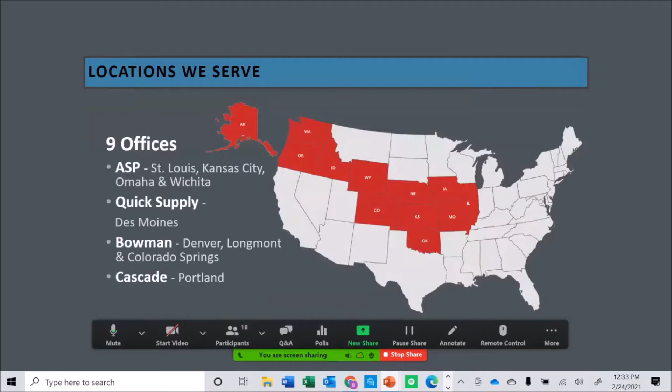There's the map that I already explained where we're at. I'm currently sitting in southern Iowa, not far from the Missouri border, but I cover all of those states. Haven't been traveling much due to COVID. In fact, I haven't traveled at all since last February, but I do a lot of virtual meetings.

We're focused on our earth anchors today, but we use those to support our erosion and sediment control market, as well as some of our other markets. We have some road projects, roadside stabilization projects, some creative stormwater projects we get into. Some of our locations actually deal in hardscapes. I focus primarily on stormwater management and innovative solutions involved with stormwater and erosion control.

We are blessed with great logistics. We have fleets of trucks, very good warehouse staff and drivers, and a lot of inside and outside storage at all of our locations. What that matters to you is we're kind of a one-stop shop for a lot of different construction site supply products. So we are a distributor.

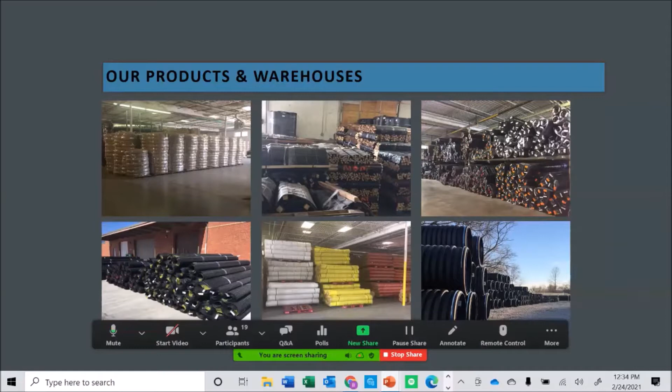We do not manufacture anything. And even though I'm a licensed professional civil engineer in Iowa, I do not compete with engineers. I help engineers and landscape architects with their designs, work with a lot of city, county, state, and federal government agencies. I also work with contractors to train them on new solutions, to help facilitate pre-construction meetings. When the pandemic allows, I'm often on site, hands-on, making sure people get past that learning curve, so anything new to them, they pick it up quickly. It makes everybody more efficient and more successful.

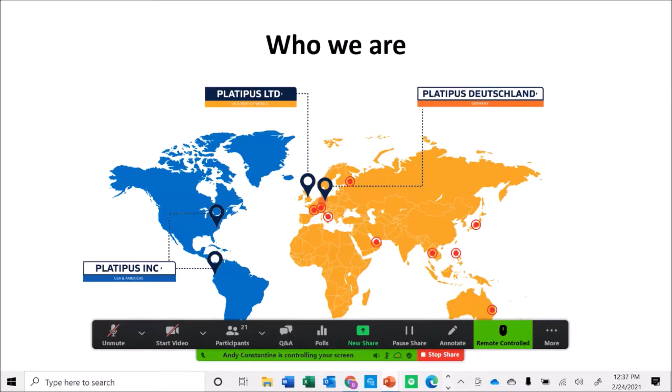Okay, all right, you're on the who we are. I'll tell you a little bit about Platipus Anchors. We started about 40 years ago in the UK, 38 years ago or so. Our owner became a manufacturer of what's now known as percussion-driven earth anchors. He came up with some ideas that he thought some of the early earth anchors could benefit from, moved production around a little bit, still mostly European, until he opened up the US operation close to 20 years ago. He had a distribution facility before that for maybe 10 years, but really got into the US 20 years ago. We distribute worldwide, as you can see in this slide, mostly through select distribution outlets. We're not everybody's commodity product, but we certainly are a solutions provider.

All right, so I guess I gotta... it delayed me, sorry guys. You're clicking pretty fast there through a couple of slides. Well, I clicked and it didn't go. Yeah, so I clicked it a second time, it might take a couple seconds every now and then. I have nothing else running, but you shouldn't be more than a couple second delay. Okay.

All right, this is the slide we wanted. So this is a really good animation. You can kind of get an idea of different applications for percussion-driven earth anchors.

You might think of the guy wiring you see on utility poles. In the UK, lots of Europe, China and other places, they use percussion-driven earth anchors for tying down or guy wiring telephone poles. In the US, not so much. They use a helical anchor for that because they already use a drill to put the telephone poles in. So they basically take the drill off of their big machine, put a helical anchor on it, screw that into the ground, and tie off to that. But other places you'll see a percussion-driven earth anchor is vineyards and agricultural.

We're probably the largest solutions provider for buoyancy control with pipe. We work with ADS and several of the other large pipe manufacturers to make a buoyancy control kit. Then you'll see us in landscaping for root ball tying down. We don't typically do a guy wire on the trees - most of ours is below grade. But what we're going to talk about today are anchored reinforced grid solutions. That's slope stability predominantly, some erosion control, and then some civil engineering applications, either temporary or permanent walls.

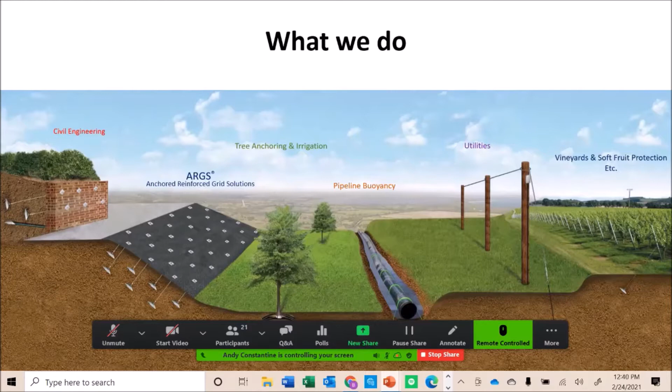So what is a percussion-driven earth anchor? It's a unique, versatile anchoring system suitable for most soil conditions. We offer an earth anchor that can be driven from ground level using portable equipment, and can be operational and proof tested immediately. It's grout free and doesn't disturb the soil when you're putting it in. There's a little disturbance as you're driving an anchor in, but you'll see in some of our installations coming up that it doesn't take a whole lot of work on the ground to get things moving.

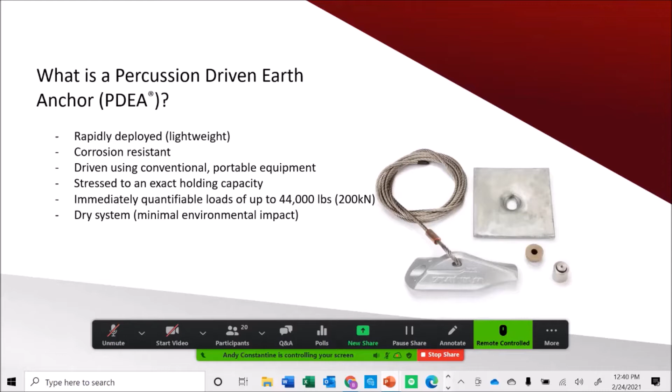I'm going to show you quite a few animations in this presentation. The first thing I want to point out is that these animations are available on YouTube. If any of you want to go back and look at them later, or share them with somebody, you can go to Platipus US, as in United States, and you'll find probably 7 or 8 different animated videos. If you dig a little deeper, there's probably 40 or 50 worldwide. We've got a group out of Switzerland, another out of Australia that put a lot of good videos online as well.

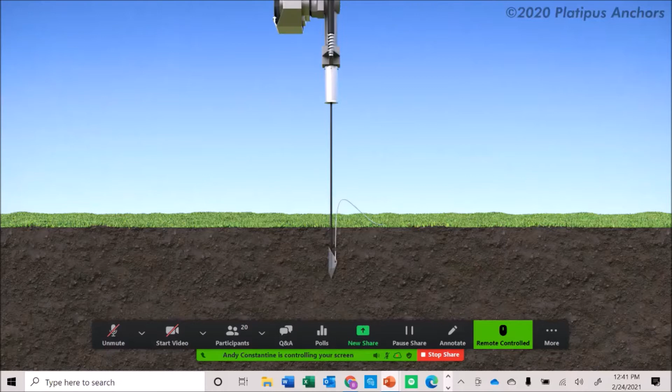What I'm going to do with this first animation is show you how an earth anchor works - the installation process, removal of the drive rod, and then activating that anchor by pulling up on the tendon. This tendon can be wire or all thread rod, but what we're going to do is create a bulb of pressure down in the soil. This whole principle of installation and loading the anchor is the same from our smallest anchor all the way up to our largest anchor.

You drive it, remove the drive steel, then pull back on the tendon or all thread rod and activate the load. What we're really pulling against is that bulb of pressure - we're not pulling against the anchor itself. Well, in principle we are pulling against the anchor, but most of the strength comes from that consolidated mass of soil that's directly on top of the anchor at this point.

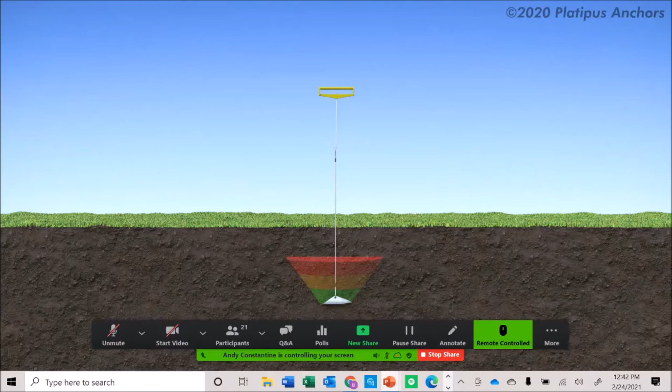Before we talk too much about the different styles of anchors, I want to talk about some of the variables involved in designing or selecting an anchor. The main one being: what's site access like? Can they get a machine in there, or can they only do it by hand? Is there limitations to where the anchor can go? Sometimes you might have utilities behind a wall or an excavation, or somebody's property line where they just don't want you to have an anchor, even though it's 10 foot deep on their side of the property.

So we run into this a lot on rail lines and that type of thing. You cannot put anything into a right of way of a rail line. They don't care if it's 20 foot deep. You can't cross their line.

So the other variables, as you see on the slide here, are really, what are the soils like? What are we dealing with? What size anchor can we even put in that area? And what kind of connection do you have to whatever that device is that you're tying down or locking off to? Sometimes it's nothing more than a stainless steel plate. Other times it's got to be tied off to another tendon.

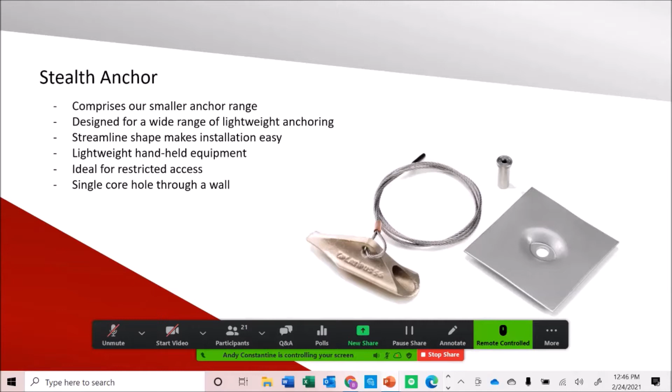That brings up our bat anchor range, and the bat anchor is a flatter, larger anchor designed to create more loads, either because you need more loads in granular soils or you're in clays. You're going to learn a little bit later in the presentation that the clays don't behave quite as well as granular soils do. So a lot of times in clays, we jump right to a bat anchor.

But the main thing to know here is, these anchors are our smallest ones, maybe 4.5 inches wide by 11, 12 inches. Really our workhorse bat anchor is a B6, and it's rated up to 44,000 pound ultimate capacity. That's really the mechanical capacity of the anchor itself. But that B6 is maybe about the size of an iPad Pro.

And then our largest bat anchor is a B10 at about 21 inches wide or long and about 13 inches wide. Maybe think of like your desktop monitor that you might be looking at right now. That's about the size of mine. So that's the largest anchor we make.

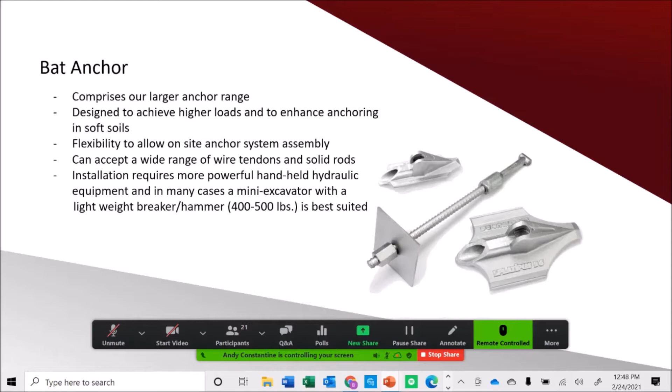As well as the different sizes of anchors, there's also different materials that make these anchors. Depending on the application, is it temporary, is it for 10 years, or is it in a caustic type environment, or is it in the ocean where you know things corrode quite quickly?

You might get into a little bit higher cost, but we use these in the ocean quite commonly, and they're not necessarily on the shelf, but we have pretty good access to them. It might take another 30 days to get them, but they are available.

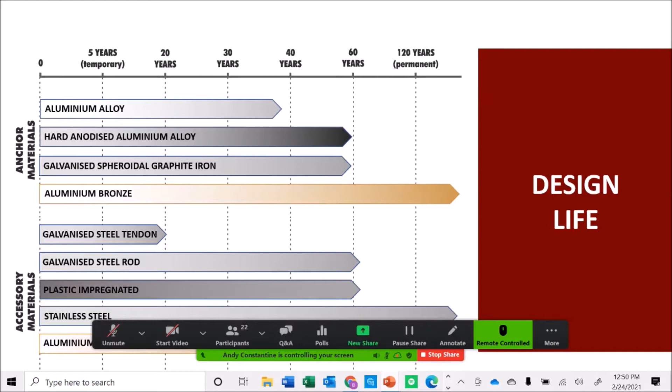So again, we ask a lot of questions going in when we start talking to either an engineer or a contractor or an agency that's dealing with an anchor. One important item, other than its longevity, is how does it tie off, or what is the top accessory?

The other thing we see on these ACBs is a tripping hazard. Sometimes maintenance folks will get on there, or even kids playing on it. So one thing you need to know about these plates and wedge grips is nothing is standard. We custom make everything. We don't have one set component that we use across multiple applications. We really build anchors to the spec or to the client's needs.

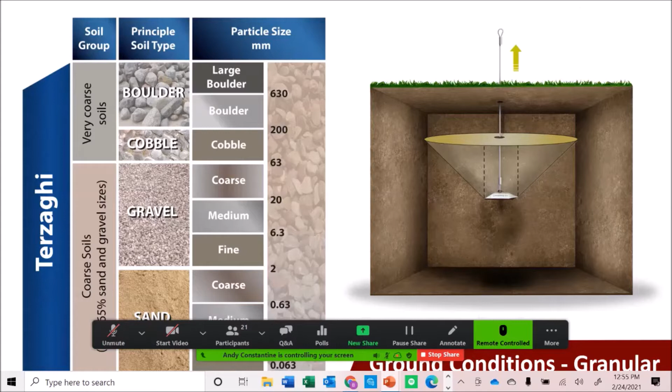If we're in granular soils, you can pretty much think about Terzaghi's equation. Some of you engineers on the call are probably familiar with Terzaghi's shallow foundation calculations that he came up with, I want to say 60 or 70 years ago. They're commonly taught still, commonly used.

Basically, we modify a simplified version of Terzaghi's equation to model a percussion-driven earth anchor. Now, our foundation isn't necessarily in the same direction as Terzaghi meant for it to be. We'll actually turn it on its side, but it still uses the same principles behind the design.

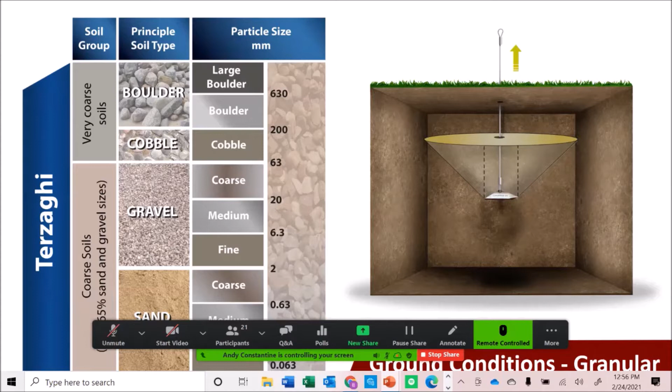That works great in granular soils. What we know about granular soils, what we've learned in the 40 years we've been making anchors and sending them out on site, is they're really nice to work with when dealing with a percussion-driven earth anchor. You can see the frustum cone, or that bulb of pressure in this slide, is very wide. As you drive the anchor in and pull back on it, it activates extremely quickly, and that pressurized zone spreads quite fast.

In clay soils, it's a little bit different, and there's a totally different set of equations that Alec Skempton came up with a little later, maybe in the 80s or 90s. He looks more at the undrained shear stress, or shear strength, of the soils to do a similar type of foundation equation to tell you how much foundation you need.

Again, we use the same theory. We can lay it on its side or upside down, whatever it is — it works the same as long as you're dealing with soils. What we found is there's a narrower cone of pressure in clays, and it'll shear through much quicker because you don't get the type of interlock that you get with aggregates. But you can still design with it using, say, a larger anchor, or making some other provisions to account for those clay soils that are more elastic.

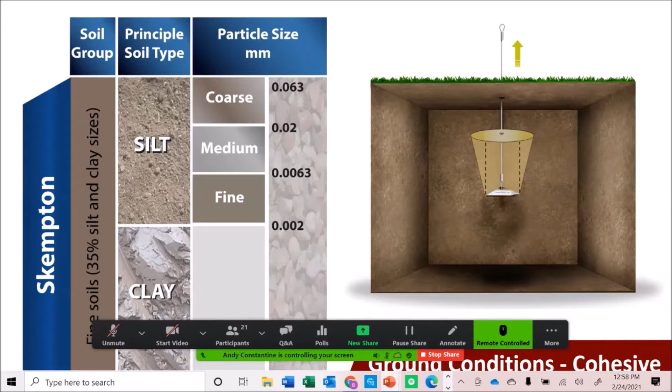If any of you have been on our website, or involved with Slide by Rocscience, or SLOPE/W software, or some of the other softwares out there, a lot of times you'll get to a point where you know how much load you need on your slope to stabilize it, and you can lay a pattern of anchors out. We like a 4 foot by 4 foot pattern because it's easy, and we always like to target our Stealth series so we can keep costs down, make the drive easy and easy to handle.

To give you some idea, an engineer may come in, run his slope stability software, and come back and say, hey, I need 400,000 pounds, and I want to spread that load out with 100 anchors on a 5 foot grid pattern. So he'll go back and do his calculations: 400,000 divided by 100, and he'll come up with 4,000 pounds per anchor. That's probably his working load because that's what the software told him.

Now he needs to figure out which anchor will work in those soils to give him those 4,000 pounds. That's where this anchor load indicator comes in. He can go online — you do have to register to use it, it's not for just anybody. We'd really like it used by geotechs, civils doing this type of design, or a structural engineer. He'll plug in his soil parameters for a granular soil, and then select an anchor.

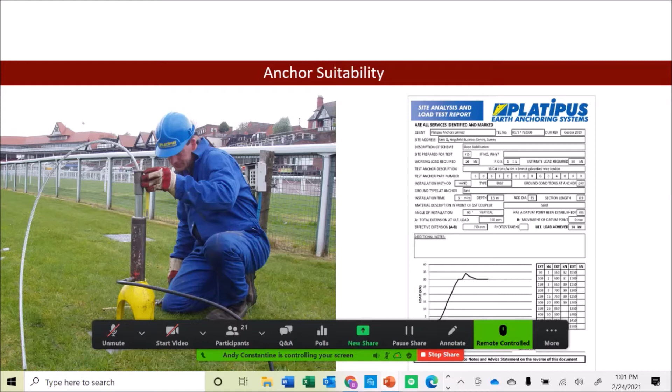So what he's going to do here is drive that anchor. He's going to put one of our load jacks with a load gauge on it, and he's going to go ahead and pull it to failure. Failure looks like where that graph flattens out, and I'm going to show it to you on this animation. It's where the graph flattens out and then sometimes even not only levels off, but starts to decline.

Early on in the test, that graph will climb extremely fast as the anchor's turning. What you're getting is a lot of extension. You're pulling that tendon, and a lot of it's coming out towards you. As you get up to the top of the graph, he's reaching the ultimate capacity of the soil. It's not going to pull out as much. It might only get an inch or so every few strokes of the jack. And then eventually it's going to level out, and then it's going to fall off. Sometimes you'll even break the wire tendon or the steel tendon at that point.

But what this tells us is that we can actually go back and back-calculate with the size of the anchor and the other items involved in this test, and get a pretty good reading of what those soils are. So in lieu of having a good soils report, we actually can send an anchor out, and something we do quite commonly - we usually do it free of charge even, and loan them the tools to run the test.

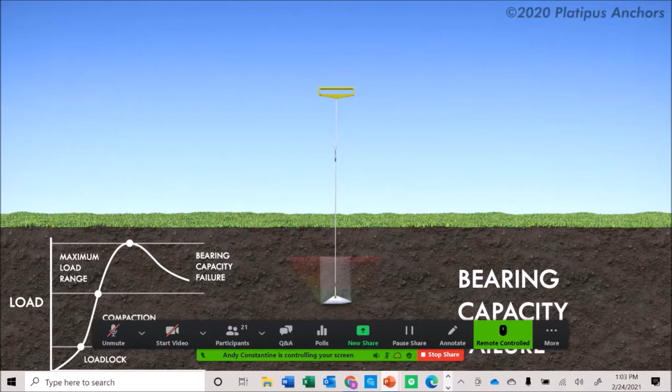We'll do feasibility assessments. We can do a design review if it's one of your first ones or your 10th one, whatever it is. It's quite common that a lot of the engineers we work with will send us over their design and ask, hey, can I do something to take some cost out of this? Or can we do something to increase my factor of safety? I'm not able to figure this one out. And so we do have that available. It's always free of charge, and they're always ready to go to work for us.

The only disadvantage we have with these guys is they're hours ahead of us. So if you're on the West Coast, that's going to be, you know, maybe a 7 a.m. call for you, because he's 8 hours ahead of you.

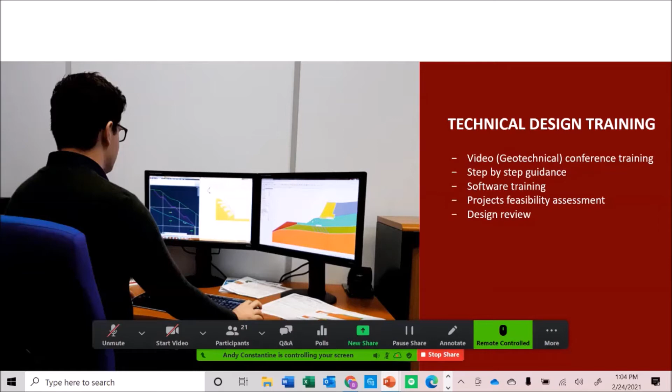All right, so one thing that our geotechnical group does for us is provide conceptual proposals. With a conceptual proposal, they'll typically run the analysis for slope stability or wall stability using third-party software. We don't create our own software. Again, we use mostly Slide, but they'll run the calculations. He'll select an anchor, put it on what he calls an anchor scheme. We'll create a specification for you, and we'll give you a quotation for it, showing you what the system will cost, less the labor to install it and shipping and all that stuff.

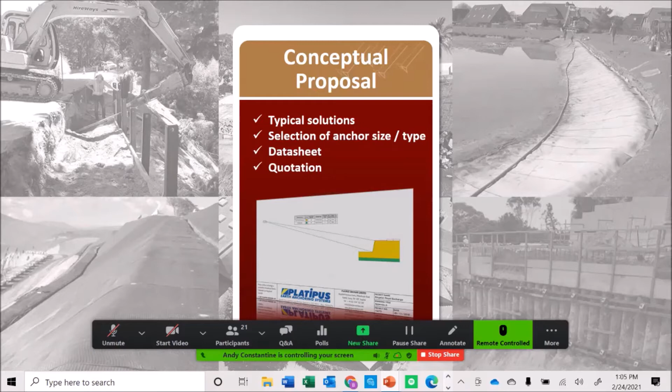He'll usually put some pictures in that are similar to that type of construction. They'll go in and do a full summary based on the information provided, including the soil parameters, the cross section itself, what access is like, and that type of thing. And then he'll actually show the slope analysis with and without the anchors in it, and the factors of safety that were gained.

And then of course give you the solution. He'll also, if you have a tie down application and you're having a hard time trying to figure out how to tie that thing down with a dead man or whatever, it's very common that we'll take a look at those and come back with a mini report. It won't be 20 pages, but it's something he can certainly take a look at for us and get you something back. This is what one of his slope analysis solutions would look like.

It's going now. Yeah, I was still talking there, I think. So, oh, maybe, oh, you know what? It was delayed for me.

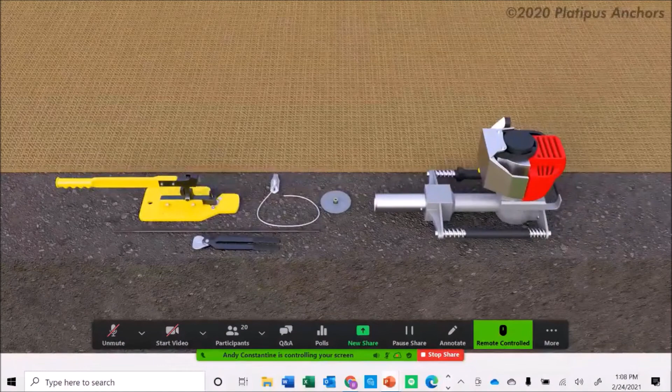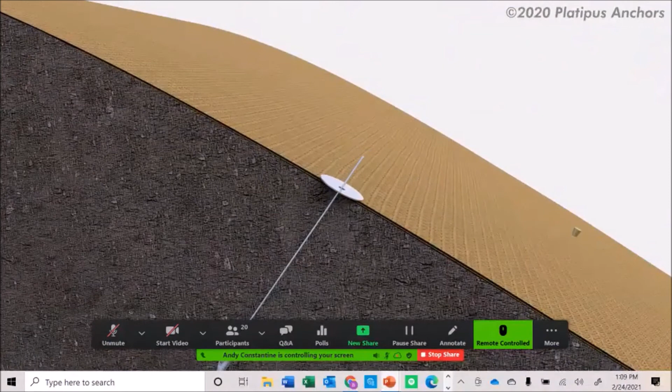So, okay. All right. So this is our erosion control application. In this particular case, you'll usually reprofile the soil, basically get rid of debris, smooth it out, put down your matting, and then you'll come in with a small hammer.

Usually can be gas powered, or we like small electric hammers a little bit better. Drive your anchor, put your plate and your wedge grip on, and then your device that you're going to use to load that anchor. We call this our SJ5. You can do this by hand, or there's another product called the Jack Jaw that is available. You can buy them on the internet. And then you might also use a hydraulic jack to load these. But most of the time for erosion control, you're not really measuring the loads. All you're doing is just tying down that mat permanently and mechanically.

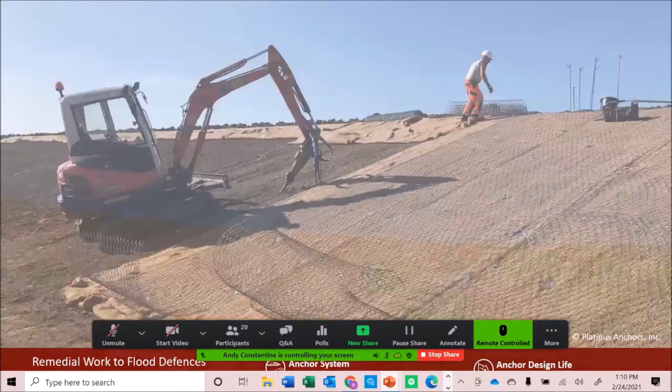All right, so here you have a typical type erosion control application. This one's over in the UK. Nice little project. I always think that the US is so much far advanced from an engineering standpoint than other parts of the world. And while I think we probably come up with a lot of the standards, like using an erosion control blanket, they actually did a pretty nice job on this project, as you'll see here. And I guess we're leaders, but they're not dummies either.

So here you can see they're using a temporary mat with a twisted wire over the top of it. In this particular case, this is an S6 anchor. So this anchor is about 7 inches long, maybe an inch and maybe 2.5 to 3 inches wide. And it can take up to a 1-ton load, so somewhere around 2,200 pounds on an application like you're seeing here. The anchor itself, you could load up to 2 tons or even probably 2.5 tons.

But here you can see the setup with this mini excavator. That hammer that's on there, that size hammer will drive even our largest anchor. So here they're using it for an S6. He'll pull the lever on that hammer to activate it, and that anchor will be driven in probably 7 or 8 seconds, if that. Then he'll pull the drive steel and they'll come in and put their tensioning device on and load that anchor up, and then snip off the leftover tendon and take care of that.

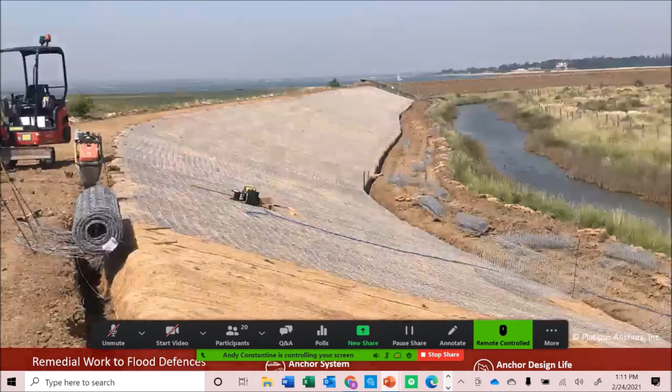Look at those anchor trenches. Nice job.

In my 30 years of experience, the biggest challenge I always had was getting the contractor to actually construct those anchor trenches and put them in correctly. So whenever I've been in and out of erosion control for years, when I was out of it, whenever I'd see an application and somebody wasn't using trenches, I'd usually go over there and make a big fuss over it. And some people would listen and some would tell me to go somewhere else. So some people, in my experience, don't want to do the trenches, so they think if they use enough anchors, they could forego the trench.

Yeah, I disagree. I still don't like that double row of staples. I still believe the best way to handle your project is with anchor trenches, because it cuts off any of the water that could get underneath those mats. I put my first TRM in probably 93 or 94, and I've used the anchor trenches ever since, and they've never been a problem. Where they don't use anchor trenches, they do have some problems. Yeah, my 2 cents.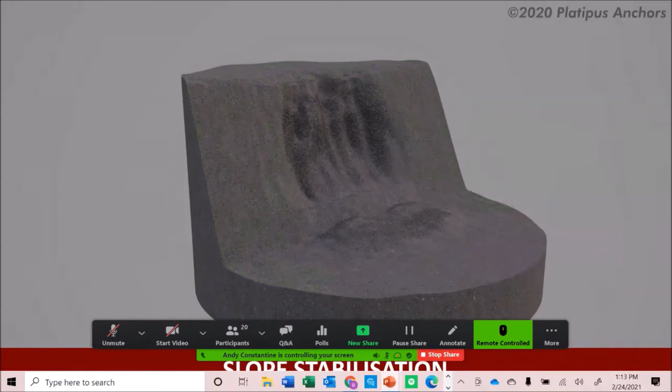All right, so now we'll look at some slope stabilization. Are you guys seeing this animation now? Yeah, it's rolling. Okay, good.

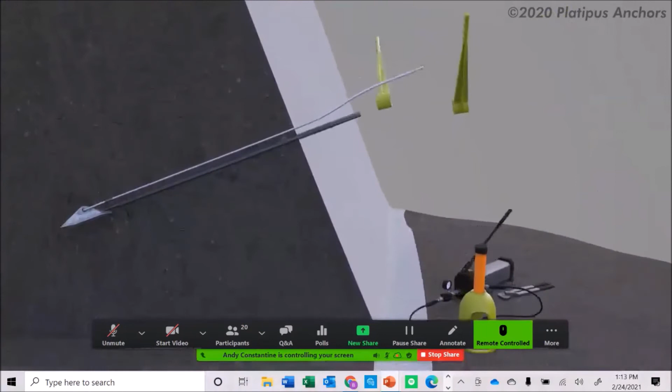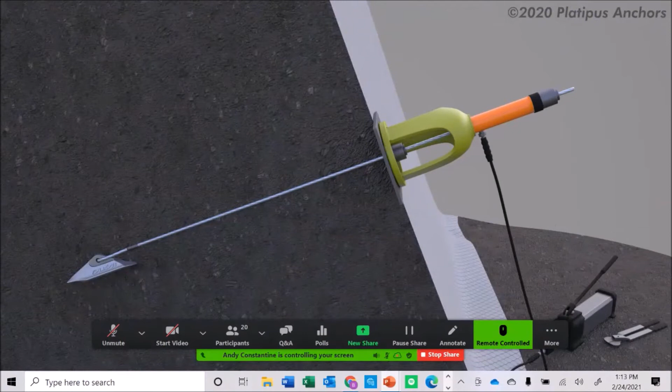So we're going to use a little larger hammer here, not so much a handheld 40-pound or 30-pound gas-powered. This would be more like your pneumatic hammer, or even a hydraulic hammer. We're driving this one, that's probably 5 to 6 foot deep. You're going to remove that drive steel, as we've shown you in all these animations. You're going to put your load plate on. In this particular case, this setup that he's illustrating is actually for a 2-ton system.

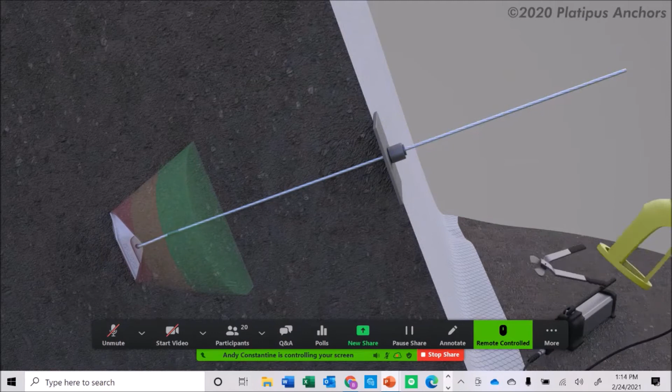So he's got a 6-millimeter wire on there with 2 wedge grips. He's got the wedge grip on top of that piston or that ram. That's going to actually hold the load. And that bottom wedge grip, they're going to lock that thing down as soon as they get load. So that's why that jack that you see there has the legs on it, so that you have access to that lower wedge grip so you can lock against that load plate.

So with that, there's also a load gauge on that. The one that we showed you here has a hand pump. We also do one with an electric pump, so it goes even quicker. But again, what we're looking at is slope stability here.

So here's a project in Chapel Hill, North Carolina. This was done last year, in fact, early in the summer. And what they had here, this was a large housing complex where they had a pretty good sized cut, as you can see. And because of some water issues, they had some slides and slumping, as you can see here.

Now, this particular engineer is one that's been using percussion-driven anchors maybe for 7 or 8 years, maybe even 10 years, but we don't do his designs. We'll review him every now and then. He'll bring us some stuff, but he does his own designs.

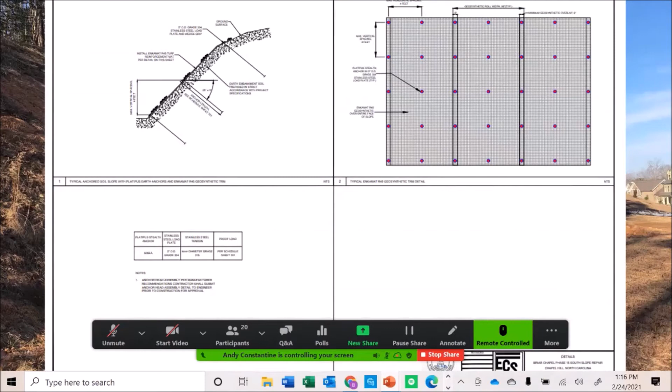What he came up here with was an S6 anchor, I think he was putting about 2,500 pounds on these anchors, driven 10 to 11 foot deep on what he called a 4-foot pattern. Now, he used a 4-foot vertical pattern. When I say 4-foot pattern, that's typically plan view or down the slope. But we still got a little bit of work to do with Steve on some of his designs. He always shows that 4-foot elevation change rather than 4 foot on the mat itself. But as you'll see here, they went in and reprofiled this slope, tracked it the correct way as we know you're supposed to do.

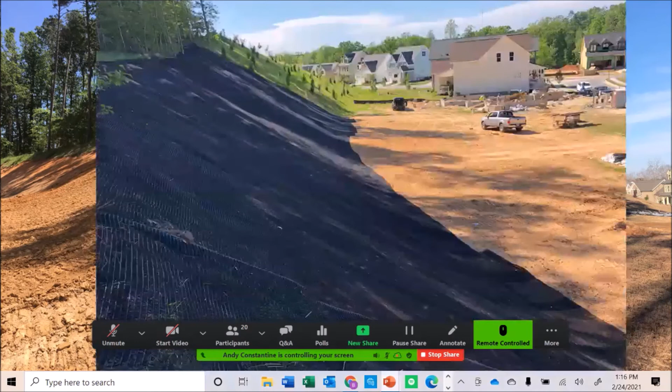They used Enkamat R45 on this particular project. The reason why they like that particular product is it's got a grid built into it, so it spreads the load of that anchor, and it also facilitates hydraulic filling.

Bringing another technology into our solutions that we provide, some of you have probably heard of the Green Armor system, where you spray Flexterra into the matting. We don't care if it's Flexterra, we'll use a BFM or whatever, but that's just a really good sound solution that works really good. As you can see here, that's what they did, and we've got a lot of options, but Flexterra is awesome.

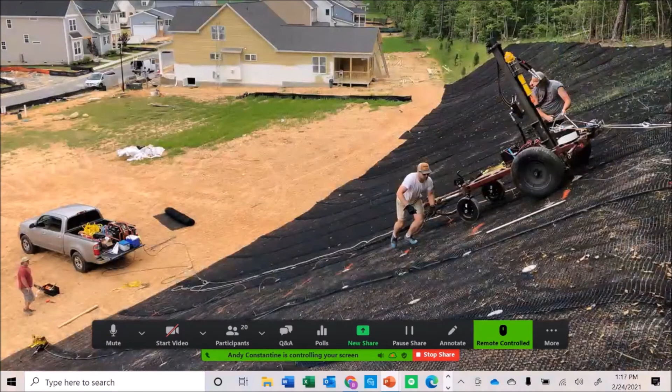This particular contractor actually built a rig too, so he doesn't have to lug around a big 90-pound hammer. He's got a winch on this thing, he's got wheels on it, and a hydraulic power pack on here. Basically it's on a slide, and all he does is pull levers. Now, it won't necessarily allow him to drive more than 4 feet at a time, but he's not holding a hammer up over his head either.

And you can see the vegetation that grew in later that summer.

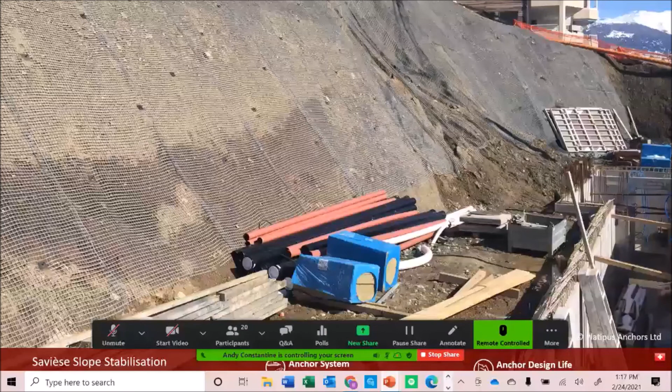All right, I'm going to take you over to Switzerland. This is a beautiful project. I wanted to use one of our local projects for a very similar type application, but I think their photography was way better than ours, so I left this one in.

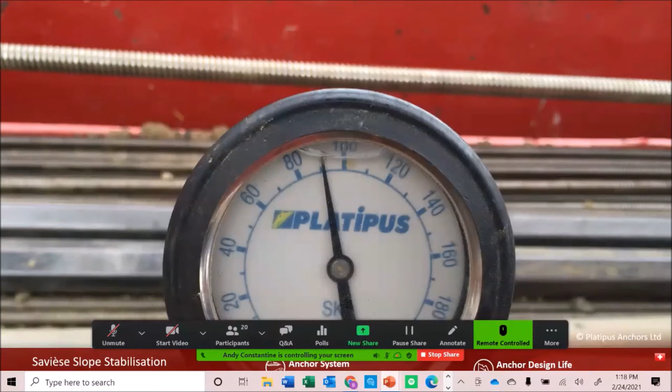This is a 45-foot cut that was pretty much an emergency type repair. They made the cut and then figured out that slope wasn't stable enough. So what they came up with was anchors coming down that slope, actually quite deep. These were driven like 33, 35 feet deep. And you can see from the load here, this is in kilonewtons. This is 90 kilonewtons, which equates out to about 21,000 pounds or so.

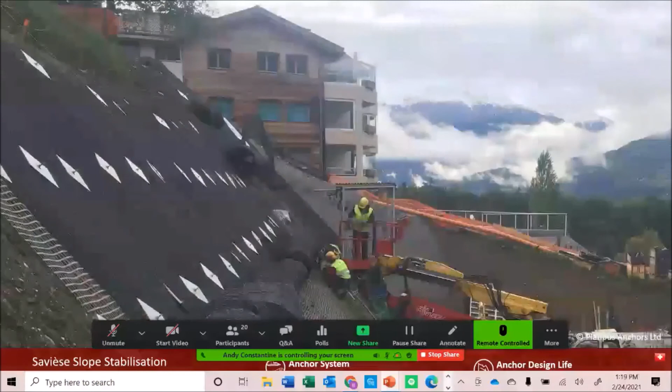That's pretty much on the higher end of what we'll typically see. We see a lot of 1 ton, 2 ton, 4 tons for these type of applications. But this particular one, they did not drive those deep anchors with a handheld hammer. This is on the lower portion where they only had to drive them in, I think it was just a few meters - 2 or 3 meters, so 6 to 10 feet, something like that - and with a lighter load too at the bottom. But it was just part of their design. So as you can see, really neat project.

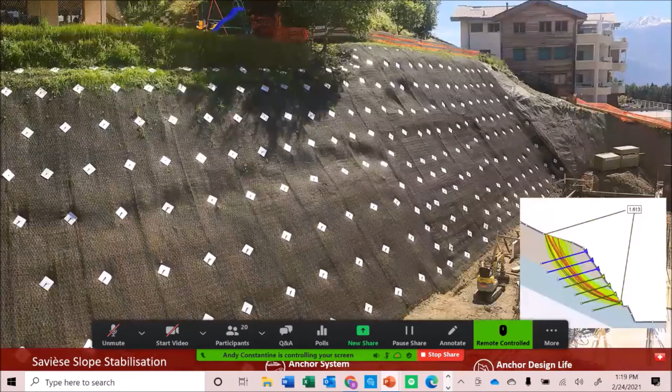They vegetated this one too. I have no idea what technology they used, if they sprayed into it or seeded it first. But again, just a great little project spotlight.

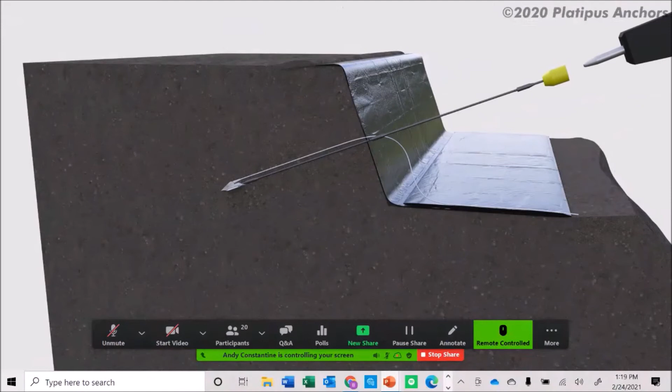So here you go, this is a steeper cut. This is when we get into some of our top-down construction. This would be for a temp wall or a permanent wall, even where they're going to put some type of facade over the face of it. Here you're going to see a multi-sectional drive steel, so now they're going to add another section. Each of those sections is, depending on the anchor and the depth, either 4 or 5 foot per section.

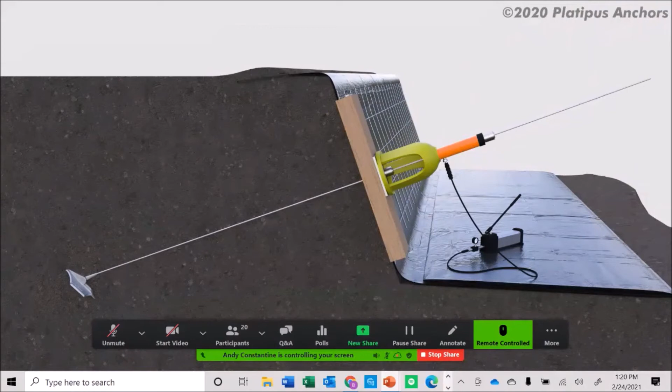Now they're going to remove that drive steel just like they always do, and they're going to put their plate and wedge grip on, and then their jack again, using 2 wedge grips, one on top. That's sacrificial on top, they're going to reuse that one. They'll break that wedge loose with a hammer and a wedge splitter. Then they'll move over and do the rest of the anchors.

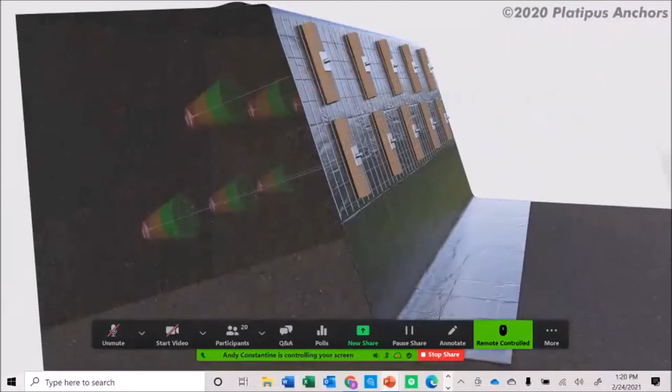On these top-down projects, you cannot excavate more than you can stabilize. So we'll have you do the entire row of anchors, and then you'll do your second row of anchors. You'll load them, get them locked in, and then go down and do your third row. This is an extremely economical way for stabilizing versus, say, sheet piling versus concrete versus timber lag.

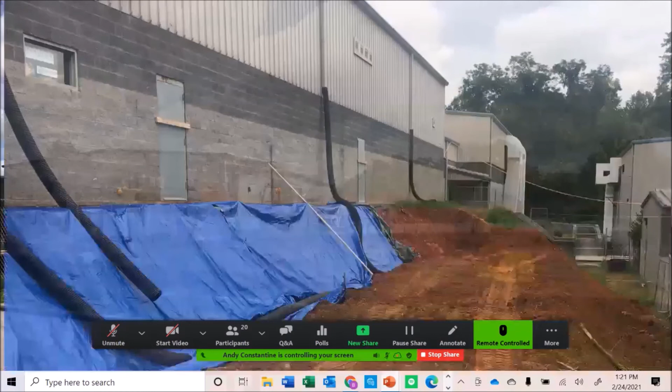Here's a project - this is the same engineer that did the Chapel Hill project. This is a Boys and Girls Club near Asheville, North Carolina. These 2 buildings, you see the one on the right with the blue reveal up on top, and then you got the one on the left, the larger building. What they decided is they needed to construct a corridor in between those, but about 10 feet below the foundation of the larger building on the left. So what they needed to do was basically shore up the building on the left while they excavated down to put the footers in and basically build the foundation and sidewalls for this building going in between these 2.

So again, this is that same engineer that's been using the Platipus Anchors for some time. He came up with a 3-row design. This was our B4 anchor, and the loads on this were about, I want to say they were like 5,000 to 6,000 pounds per anchor.

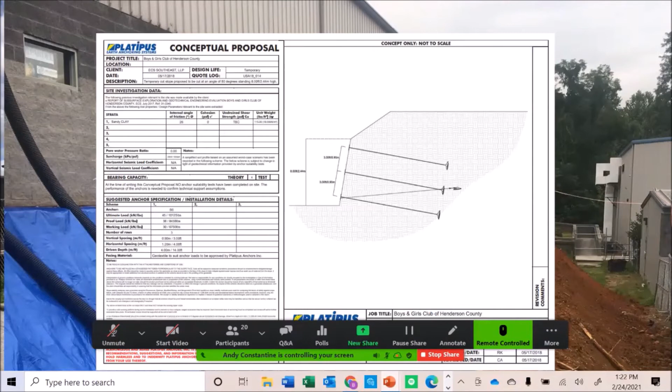Spacing, I don't remember if it was 4 foot, or he might have had to tighten it up in some areas vertically and then spread them out horizontally. But this is what it looks like. It's not beautiful all the time, but it is very effective.

What we found is these walls in place, construction, materials, shipping, and built in place for the whole thing usually run somewhere between $25 to $35 a square foot of wall. That's going to be a fraction of using soil nails, a fraction of using sheet piling or some other type of lagging and timber.

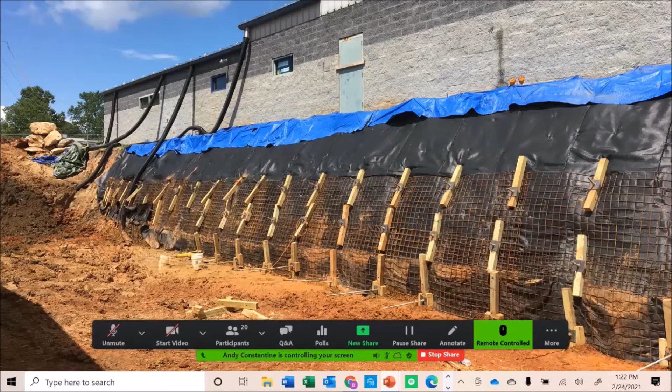This is my favorite project here. This was New York DOT that we did 2 years ago. The project came in late in 2019, literally after Thanksgiving. Within about 2 weeks, the design was accepted. There was a design build by the contractor, CCA Contracting out of New York. What they were doing here was widening the lanes on this expressway.

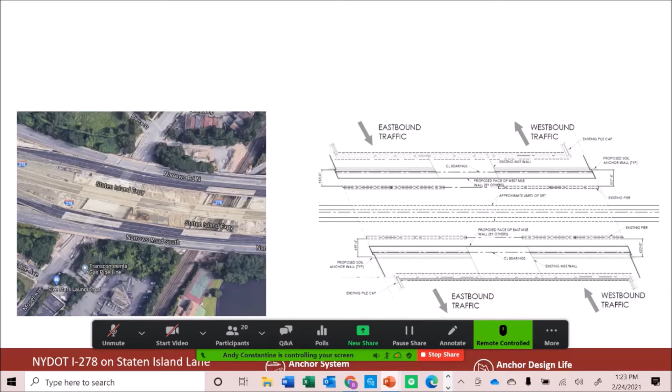So they needed to build a new MSE wall to accommodate the new lanes going in. To build the MSE wall, they had to stabilize the current lanes so they could keep the highway open while they built the new lanes. Same kind of construction that we just saw.

It was top down. Here's the engineer's design. He went 14 foot deep with a B4 anchor on 5/8 inch rod. This was all temporary, so he used black steel, which might last 3, 4, or 5 years in the ground. After they built the MSE wall in front of it, it really didn't matter.

Got some really good pictures from this project. You can see here the initial anchors they were putting in. They did their excavation, lined up their excavator with their pneumatic hammer on it, and built this little jig down here at the bottom to hold the anchor on the correct angle.

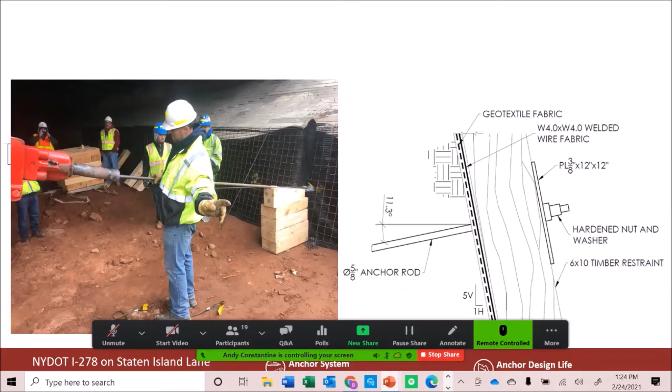I got to start clicking a little bit sooner here, about 5 minutes left. So they put the load jack on. In this case, rather than a wedge grip, they actually used a load nut, a little bit easier to use—you can certainly break it apart easier. But again, they have a gauge on there telling them when they hit their 6,500 pounds or whatever that number was.

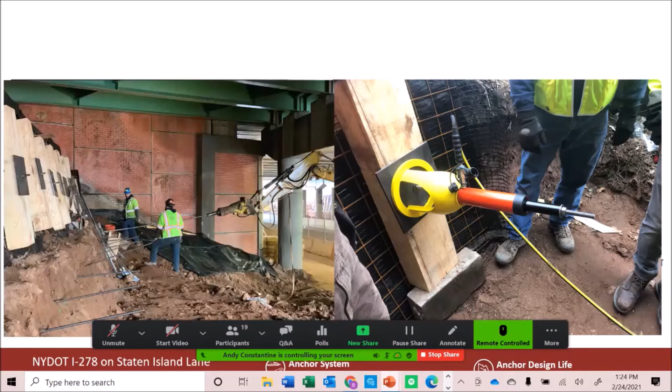Starting the second row, they excavated down a little bit further, put all their anchors in, then loaded them up and locked them off against these timber soldiers.

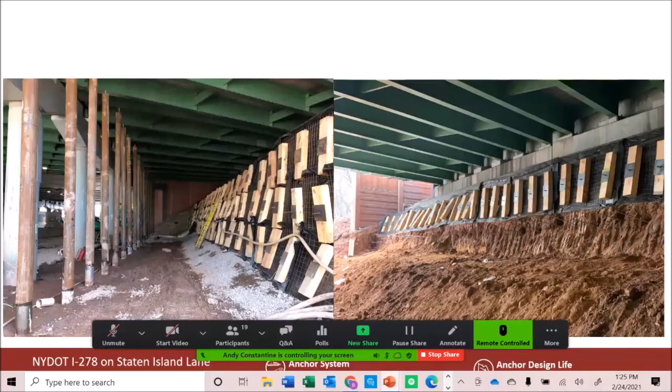Again, this has always been one of my favorite jobs. The other nice thing about it is this came in late October, mid-November or so, and then we were shipping materials by the 1st of January. We ended up selling about $200,000 worth of anchors on this project. I'm going to guess the contractor saved $1 million or so doing this.

All right, so one more. This was also in the New York area, on the New Jersey side. What we were dealing with here is another 45-foot deep cut for a wastewater treatment plant. They needed to excavate down and shore up as they excavated down.

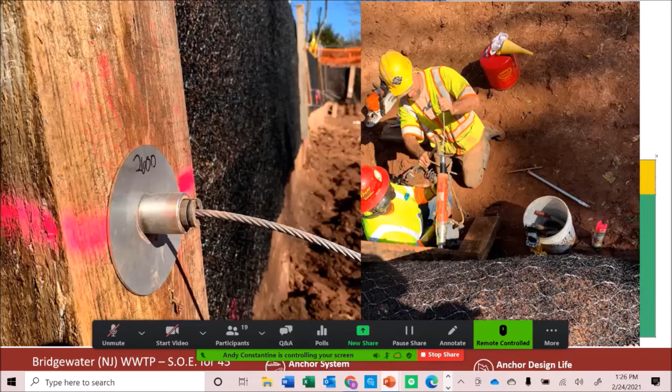We gave them a 1-ton system. Their engineer looked at it and decided he wanted to up that a little bit, so he went up to 2,600 pounds. We basically just had to go to a little larger wire tendon to support it. Same anchor head was used. That 2,600 pounds you see written in marker on the load plate, that's the working load they actually were required to load to.

In this particular case, they did not use a welded wire. You can see they actually used a twisted wire, like a gabion-type wire that has a built-in matting right into it, so they didn't even use a geotextile behind here. But a great little project.

I think I got one other slide that shows you the full construction of it, 45 feet deep, looking straight down with a drone after they built up to, probably 35, 40 feet at that point.

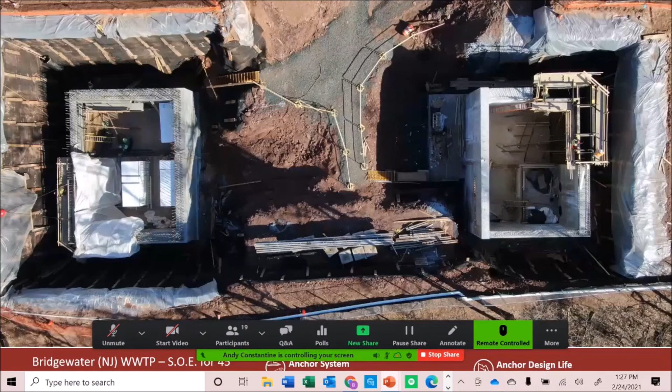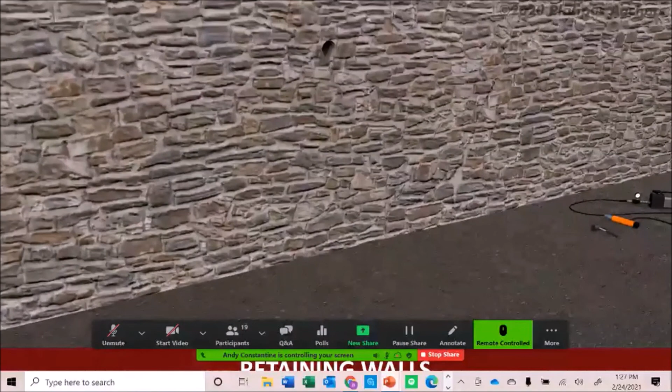So we get a lot of questions that say, well, how deep can I put these? How tall of a wall can I build? Really there's no limit on the wall. We might have you batter it about 10 degrees back, so you can't go 100% vertical, but we do 8-foot walls and we do 70-foot walls. It just depends on what's required.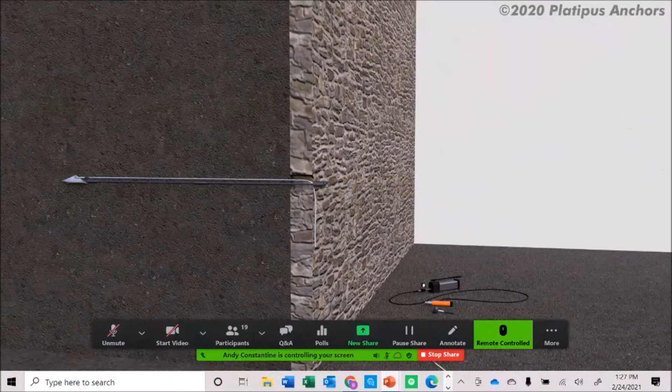I really want to show you these next pictures. Same type of construction. This is for an existing wall going in to tie it back to do some repairs. It's all done the same way.

They'll usually spend about 4 or 5 minutes driving the anchor and another 4 or 5 minutes loading it. We conservatively say you can do 3 to 4 anchors an hour with a 3-man crew and an operator on the machine.

In reality, a lot of times the contractor will figure it out. He'll do 3 or 4 an hour for maybe the first 6 anchors, and then figure out how to go a little quicker, and they might even get it up to 6 to 8, sometimes 10 an hour.

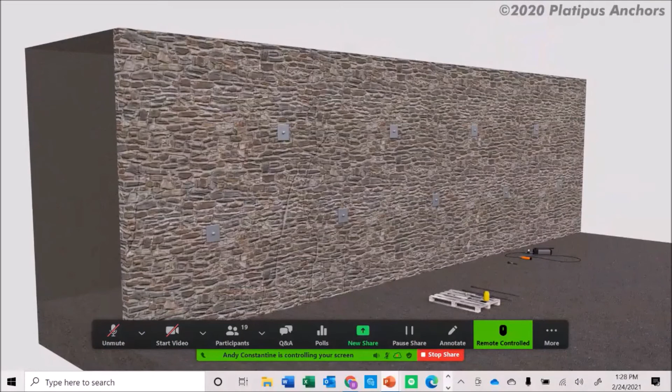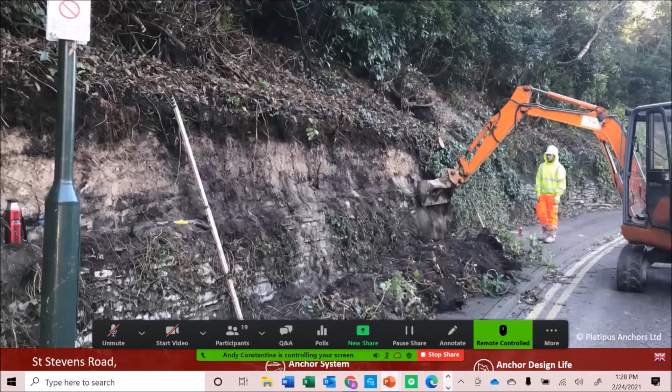This is another neat little project in the UK, where this wall could be 300 or 400 years old. They do a lot of restorations over there like this. Our UK division probably has 25 case studies and spotlights similar to this.

This is a great picture because here you can see them driving the anchor, so you can see what the hammer looks like. That's a lightweight hammer driving — I think those are S8 anchors. You can see the drive steel, and the shank adapter that goes from the hammer point to the drive steel. That's one way to do it. And closer up, with the yellow legs, you can see the loading process in full action there.

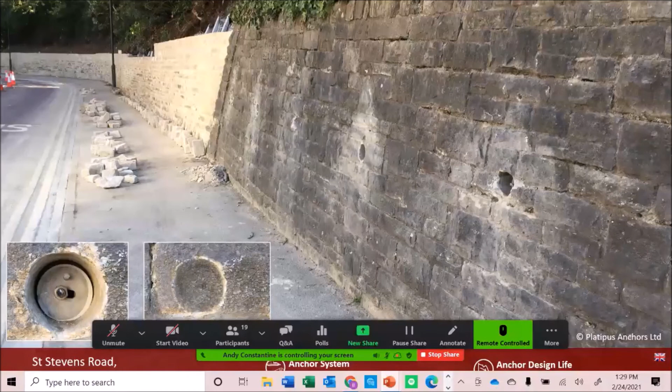They use these concrete soldiers rather than timber because this is permanent. A lot of times they'll use steel. This particular guy, I guess, figured out a way to strengthen their concrete to where they can use welded wire behind it with concrete, and then they'll build a new wall in front of it that looks like an old wall.

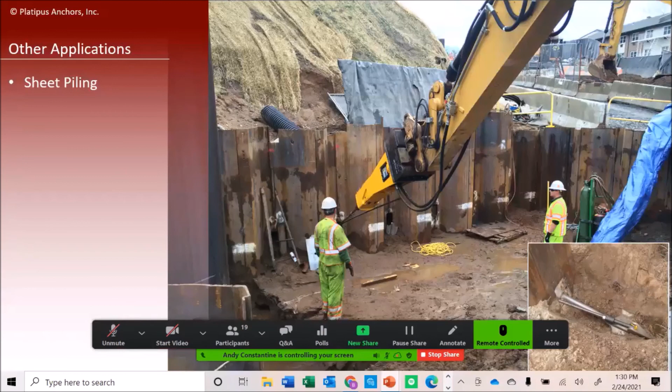Here's a sheet pile application where they were required to tie back sheet pile. This was another New York DOT project, maybe 6 or 7 years ago, the Tappan Zee Bridge project. You can see in the bottom right corner the anchor on the other side of the sheet pile.

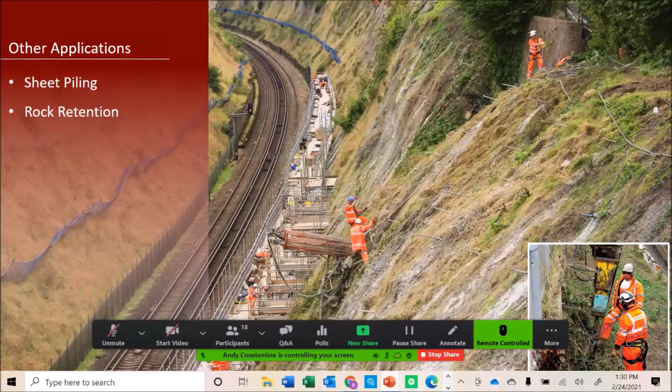We also, in some of the Rocky Mountain regions you guys might cross, get into rockfall protection where they have to tie those down. A lot of times this isn't for stability, it's just tie down of the matting itself.

Then you can see a railway support. The anchors are maybe every 6 or 8 foot on center there. A lot of times they'll use soil nails on these.

Again, percussion-driven earth anchor is good — we like to say 30 foot deep with a working load about 30,000 pounds. Whereas soil nails, a lot of times those guys will go 40, 45 feet deep, and they'll have 100 or even 120,000 pounds on those. So it's kind of a different animal. We're a niche where you don't need that much load.

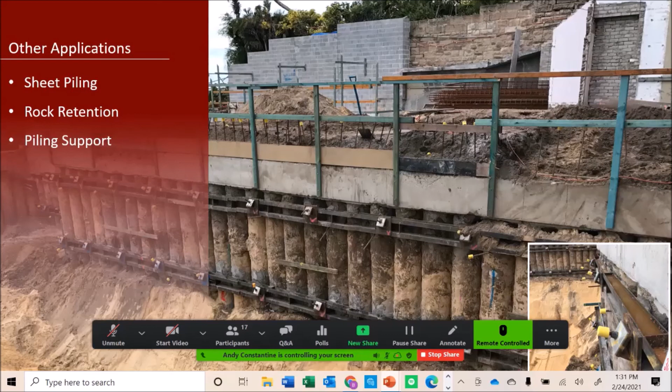You don't need that special equipment to put it in. You don't have to mess with grout, with the curing of the grout, or with a 24-hour test. Our anchors are immediately serviceable — you literally drive the anchor, load it to that working load, and there's no reason to hold on to that load to see what it's going to do. Once you build that cone of pressure, you're built, and it's holding you back.

Another quite large industry we're in — we're pretty much the only manufacturer with a percussion-driven earth anchor system for exposed membrane liners on landfills. We had a project last year, I think about 50,000 of these on a project in New Orleans. It was a nice little project that came in right at the beginning of COVID, so where other people were gearing down, we were just gearing up. I don't even think they've installed them all yet, but they'll put these on a grid pattern too, usually 10 to 15 foot.

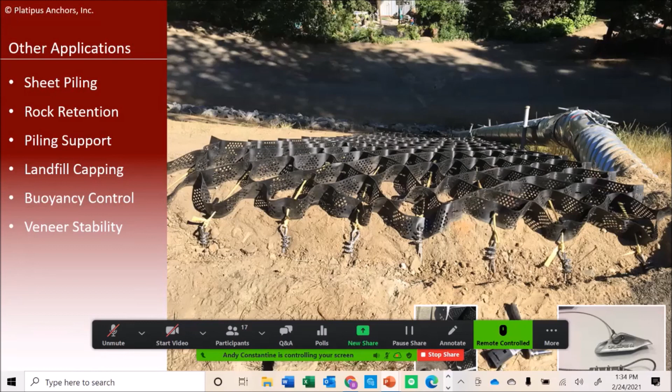Here you can see it's actually tied off. It's not a real highly engineered connection, but we do 3, 4, or 5 of these a month. Very common. That tendon hanging down off the anchor has clips along it to hold each cell.

That's what we call a rope grip or a cable clamp. Once the contractor installs the anchor, he can create the loop on top himself using that cable clamp. He'll put 3 of those in a row, which, in the rigging industry, means that if you have 3 cable clamps in a row, it equals the strength of your wire. That's why we use 3. It's always stainless steel - we use the grade 316 stainless steel tendon on those.

The reason they want to create that loop in the field is because if we did it in the factory, you'd have loops at different elevations by the time you load that anchor. You might not drive it to the same depth, or you might get more extension out of it when you go to load it. So here's a marine application - we're just about at the end of the presentation here.

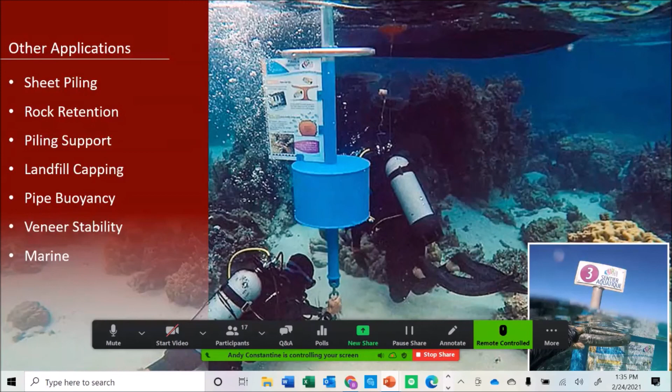We do a lot of underwater anchors. This is where our aluminum bronze comes in. Sometimes they're temporary, sometimes they're permanent.

Just a quick summary of the key benefits of using a percussion-driven earth anchor: they're simple and effective, lightweight, corrosion resistant, fast and easy, with immediate quantifiable load. This is something you don't get with a soil nail - they're not 100% loadable until you get full curing of your grout. These anchors are good for temporary and permanent applications, cost effective, no grout required, low environmental impact, and suitable for areas where you don't have much space.

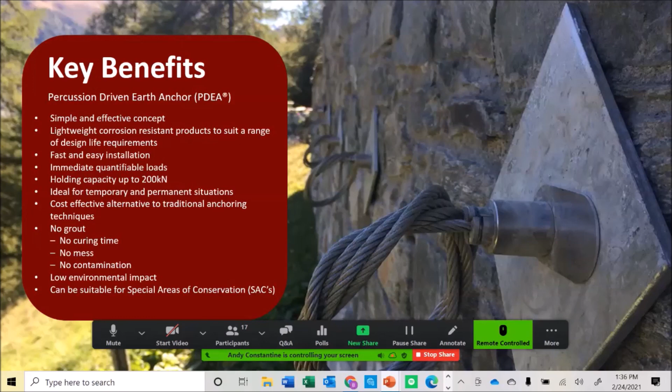I think you're there. Yep. So I don't know if you ever came up with any questions, but I'll turn it over.